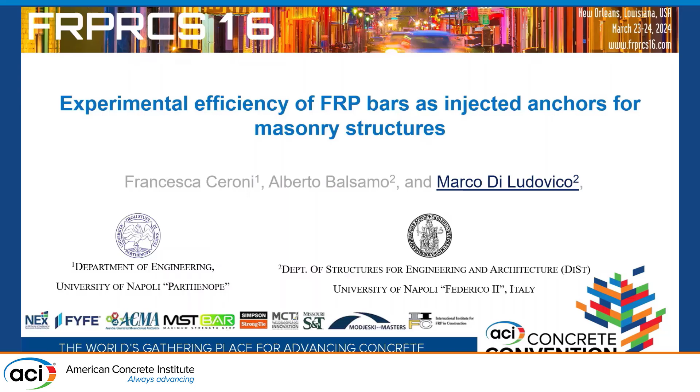So I will talk about the first presentation, about the experimental efficiency of FRP bars as injected anchors for masonry structures. This is work I did together with Francesca Ceroni from University of Naples Parthenope, and with Alberto Balsamo, also from our university. So let's take a step back.

Let's introduce the problem. As you know, Italy is a country very prone to seismic action. Our problem is that when an earthquake happens, we have very large and severe damage on masonry buildings, due to the fact that in several cases the connection between orthogonal walls is lacking or completely missing. In this case we have this mechanism: the simple overturning of the facade. When there is a little bit of connection, we can have the compound overturning. In each case, there is very high vulnerability of masonry buildings against seismic action, and that's why we need to do something to avoid this kind of mechanism.

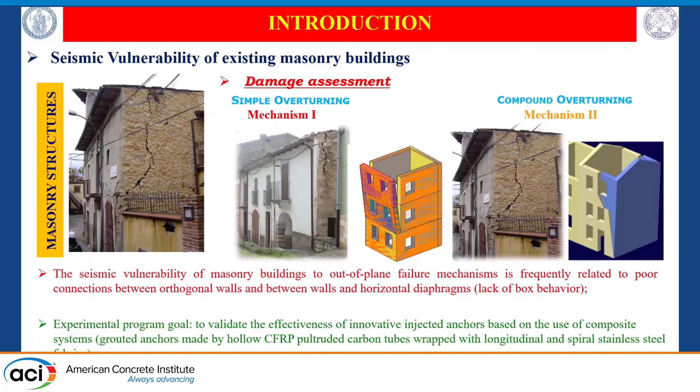Traditional solutions are mainly the use of steel ties, which is very common in Italy and in seismic areas in general, or the use of RC or steel confining elements. But what we are looking at is the use of injected anchors, traditionally made with steel rebars, the idea being to connect two orthogonal walls in order to avoid the overturning of masonry.

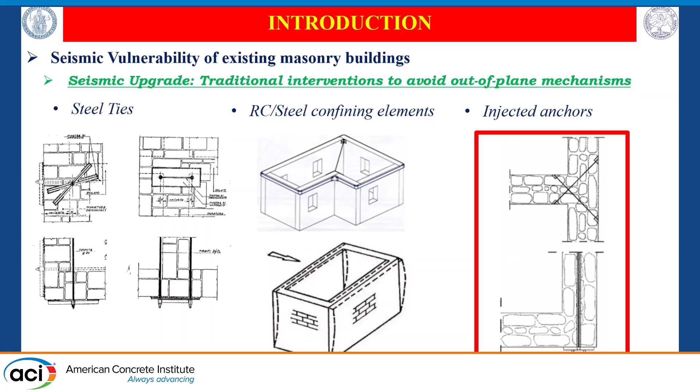It is a very good solution, as clearly demonstrated by this picture. This is Amatrice, a small municipality in central Italy, which was completely devastated by the earthquake in 2016. As you can see here, this was the core of the municipality, but one of the few buildings which remained, which stayed and did not collapse, was this one.

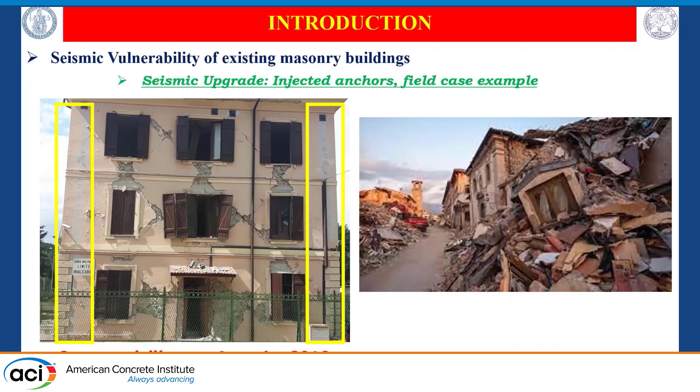You can see that they had already finished doing injected anchors, and the building achieved the so-called box behavior. The damage was then evenly distributed, as clearly demonstrated by the diagonal cracks. So the solution is good and it works, and this was demonstrated in the field, which is the most important test.

But now we are looking at how we can move forward, how we can use this solution by replacing steel, which is obviously a traditional solution but has very high problems in terms of corrosion. This is a typical problem we find in masonry when we apply steel injections, because especially when we use tuff masonry, this can accelerate corrosion, and then cracks can generate.

So the idea is to replace steel with FRP bars, which give us much higher strength and corrosion resistance, and in this way they can really be a sound alternative.

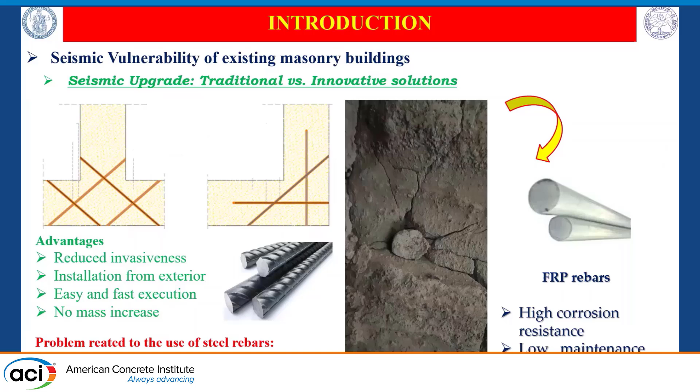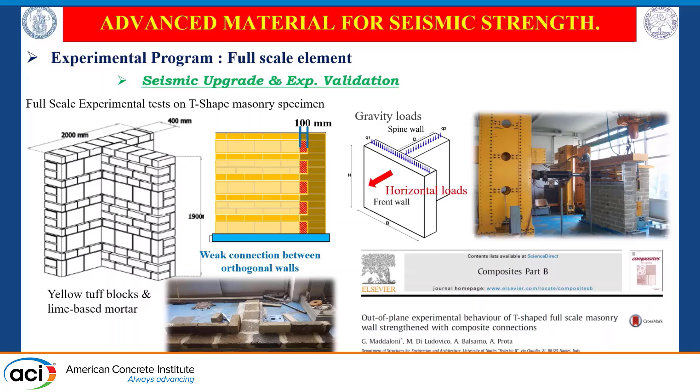So what we did: we started looking at this potential solution in 2016, when we decided to test a full-scale member, two walls very poorly connected, as you can see here in our lab. We applied gravity loads and horizontal loads to simulate the earthquake, and we decided to compare the behavior of the specimen without any kind of solution versus using injections made with FRP bars.

To be quick, this is the result we obtained during the test on the as-built specimen. Here we are plotting the horizontal force versus the drift, which is the horizontal displacement divided by the height. The red line and the orange line represent the theoretical force at which mechanism 1 and mechanism 2 can happen. Since we had a poor connection, the capacity of the member was in between the two mechanisms.

Then we stopped the test. You can see here the cracks at the interface between the two walls, and we decided to investigate the effectiveness of a new solution.

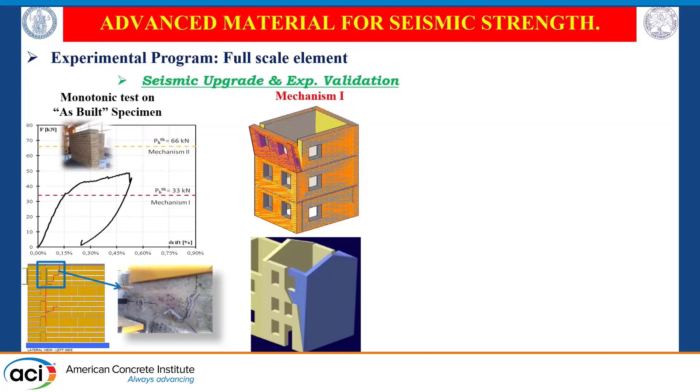In 2016, we used a carbon tube, which can be seen here, injected in this way. But in order to increase the bond between the injection and the masonry, we used this hollow carbon tube with a stainless steel fabric wrapped around it, to improve and increase the bond and avoid the solution being ineffective.

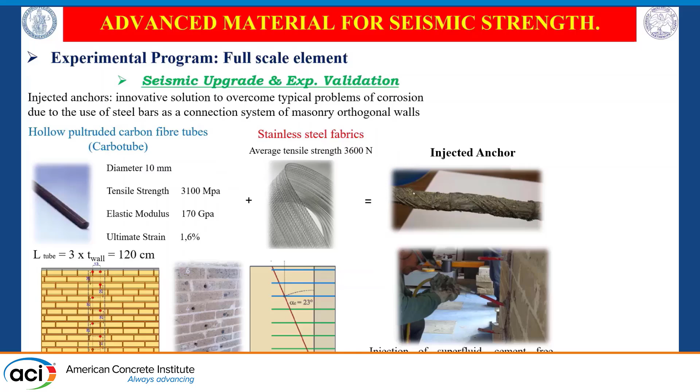So we did the test, and at the end, when we performed this kind of intervention, the new behavior is this one, reported in the green line, and you can clearly see how much the capacity increased.

We strongly overcame the capacity predicted by mechanism 2. In general, the failure moved from cracks at the interface, and we had no cracks anymore, just a rocking mechanism, demonstrating that the solution was really effective, with a very high strength and ductility capacity increase.

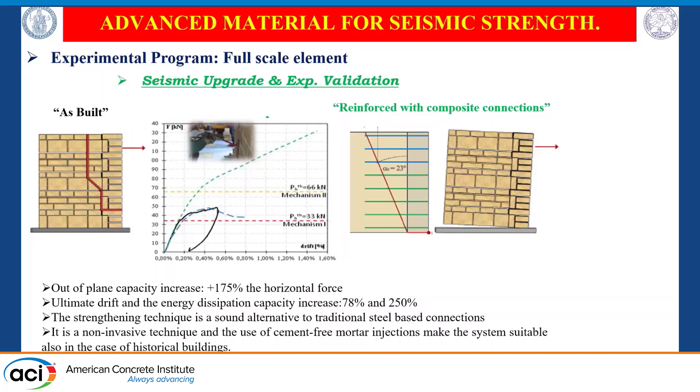This was done in the past. Now we are trying to understand: the solution is effective and sound, but we need to provide reliable design formulations to understand how much pull-out force we can use in calculations, so practitioners can design this kind of solution. First we did a literature analysis, and found a lot of theoretical formulations, mainly calibrated on steel rebars. So now we need to understand how these formulations apply when we replace steel with FRP.

Generally speaking, the pull-out force depends on several factors: the type of rebar, the type of surface treatment, the embedded length, the masonry quality, and the injection mortar quality, among others. Depending on these parameters, we can attain different kinds of failures.

The red one here is the cone masonry detachment. Then there is the probability of slippage between the bar and grout interface, or between the grout and masonry interface, called here CMD, SBG, and SGM, and we can also attain a mixed failure mode.

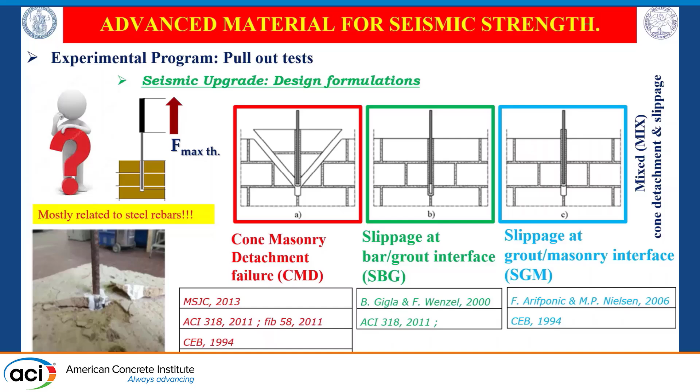So what we are working on now is defining and carrying out several experimental tests in order to evaluate how much the pull-out force is in the case of FRP rebars.

This is our test setup. We decided to test a specimen made of 3 blocks, made of tuff or other types of masonry blocks. The embedded length was 25 centimeters. An important aspect of our experimental program was the confining pressure, provided using this device to exactly simulate what happens in a building when there is gravity load in one direction and pull-out force in the orthogonal direction. So we had a confinement pressure of 0.4 megapascal simulating the gravity action on the masonry.

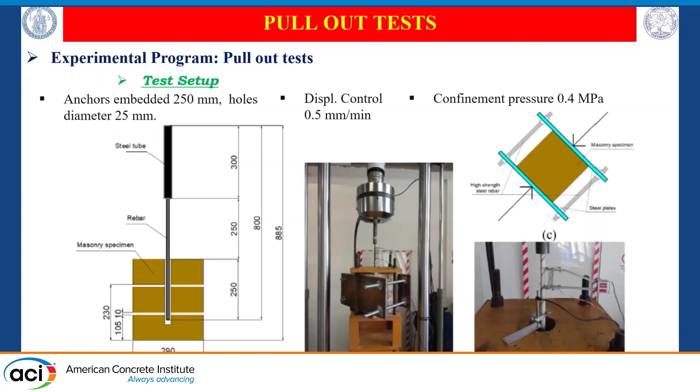Now I will try to summarize the results of 2 rounds of tests that we have done in these years. The first one, performed some years ago, details of which you can find in this paper.

We decided to investigate the effectiveness of several solutions. First, we used ribbed steel rebar as a reference, because the theoretical formulations are mainly based on steel. Then we used GFRP rebars and smooth carbon FRP rebars, with diameters of 12 and 10. We decided to replicate the surface treatment used in the preliminary experimental validation.

At the end we had 15 masonry prisms and 5 types of anchors: steel, glass rebars with or without surface treatment, and hollow pultruded smooth carbon FRP with and without the surface treatment.

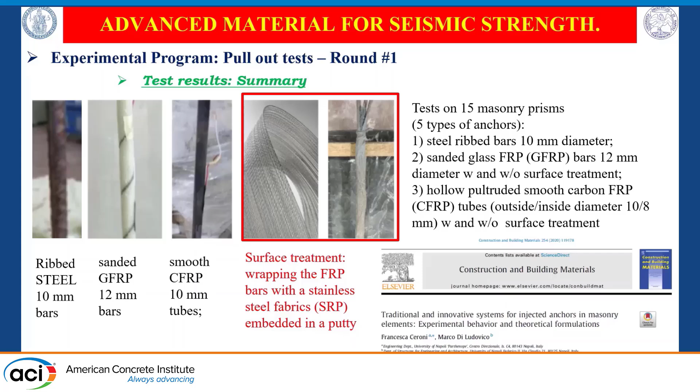Here you can see the failure modes attained during the tests. On the left, the green box shows slippage at the bar-grout interface, which was due to the bond not being good. When we look at the performance of rebars with surface treatment, we see two other failure modes: sliding at the grout-masonry interface, or the cone detachment, as shown here.

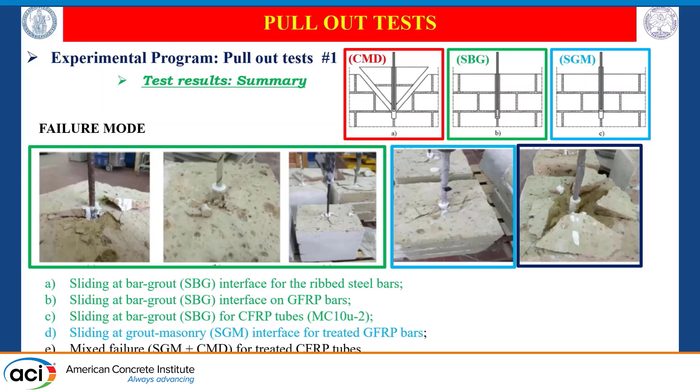In this slide I try to give an overview of our experimental results. Here you can see the specimen labels, meaning the material, which is masonry, then the bar type—steel, glass, or carbon—then the diameter, and then the surface treatment: ribbed, treated, or untreated, with the stainless reinforcement shown before.

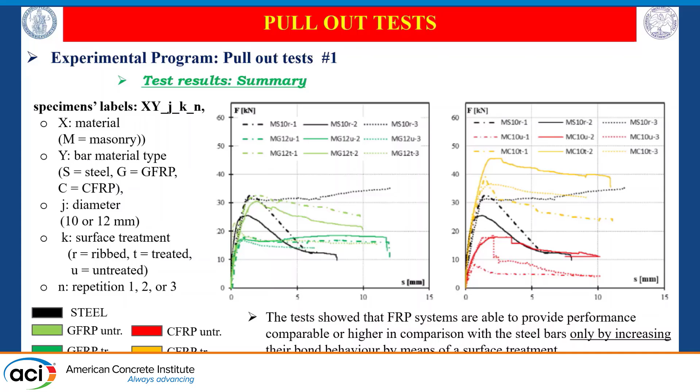The black curves are the 3 repetitions made on steel rebar, the green ones relate to GFRP, and the orange and red ones to CFRP, treated and untreated. Comparing the force-slip displacement, when we compare these rebars' performance with steel, a good behavior is attained when surface treatment is done—similar to or even better than steel—while without surface treatment, the results are less significant than those attained on steel rebar.

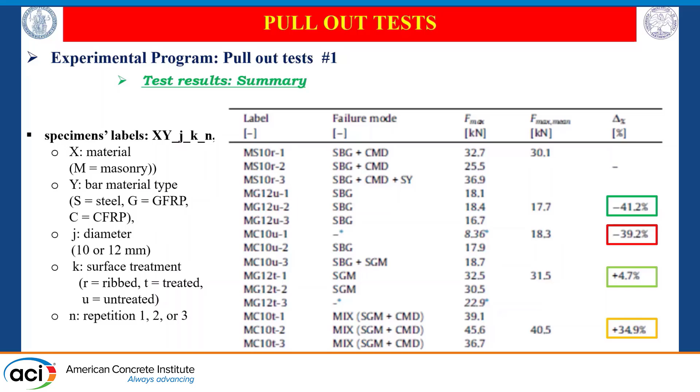Here you can see in this table the final values of the pull-out forces and the average values, and how much, with or without treatment, we had different results with respect to steel. Without treatment we lose 40% of the pull-out force, while in the second case we attained more or less the same value, or even in the case of carbon solution plus treatment, the same solution used in the full-scale specimen, we attained a pull-out force even greater than that achieved on the steel rebar.

Since our final goal is to calibrate a theoretical formulation, we decided to enlarge our experimental test program, so we have round 2, and now we are looking at the performance of other kinds of rebars: basalt rebars with diameter 8, and carbon smooth. The basalt has a helicoidal ribbed wrapping, as you can see here, and then glass, diameter 10 and 12, with another type of surface, an helicoidal wrapping, and finally a new solution investigated in this round of tests: a glass spike with a sand coating.

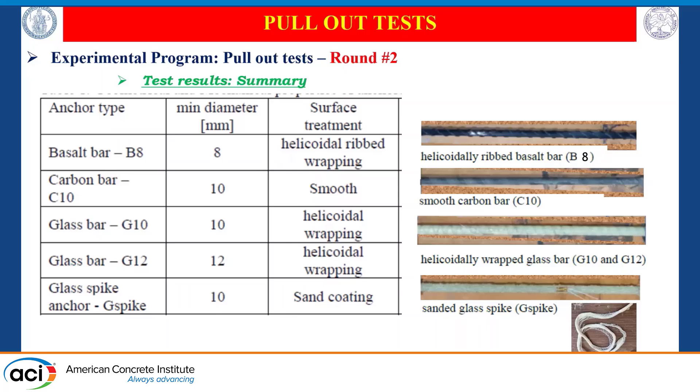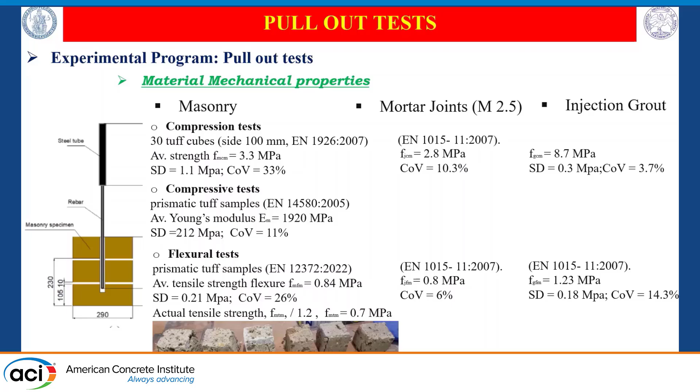You can see this is the original spike, which can then be realized in this way. So again we tested all the materials. I have no time to give you all the details about the material properties, but I want to show you that we did all the tests on masonry, mortar joints, and injections.

Very quickly, moving close to the conclusions, these are the results we obtained. This is the GFRP rebar behavior, 10 millimeters diameter and 12, and you can see here the failure modes. In this case the masonry quality was a little poorer than in the previous round of tests, which was the reason why we had in most cases mixed failure modes. But it's interesting to see that after the peak on GFRP bars we had a quite sinusoidal trend, due to progressive slippage between bar and grout, which resulted also in a reduction of the bonded length. So this was the behavior recorded by the tests.

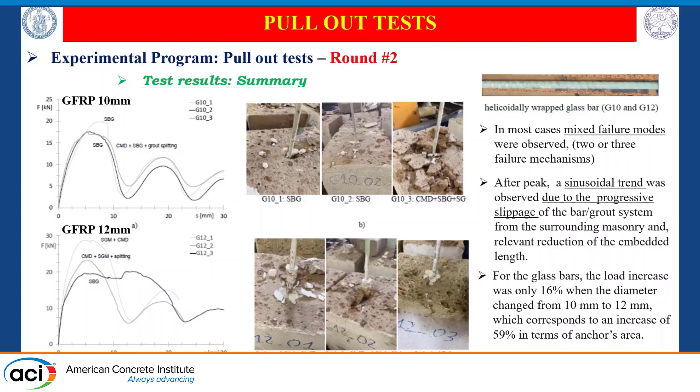It's also interesting to note that moving from 10 to 12 millimeters, the load increase was not as high as the area increase. So the load increased by a factor of 16%, while the area increased by a larger factor.

Moving to basalt, you can see the ribbed basalt bar performed quite well. We had a force which was greater than before, so the highest value of tensile stress was achieved. There was also good behavior after the peak, so there was a residual bond giving us ductility.

In the case of carbon bar 10, with another surface treatment which was smooth, we had not such good results in terms of load, and this is because obviously the bond plays an important role.

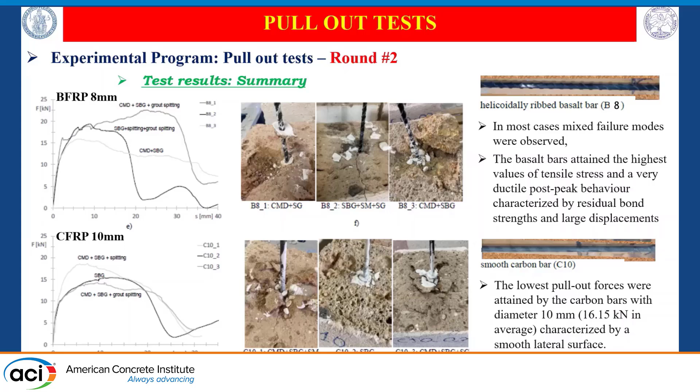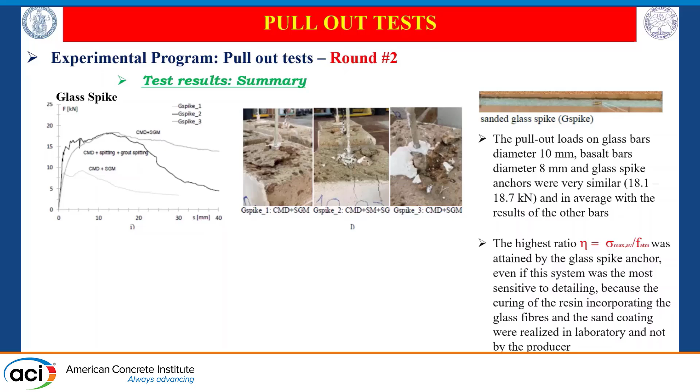Finally, the glass spike that we tested was really surprising because it gave a good result both in terms of pull-out force and ductility, but the most important fact was that it attained the highest ratio between the maximum stress in the rebar and the stress related to the capacity of the rebar. In this table you can see the ultimate stress capacity of each rebar and the one achieved during the test, and this is the ratio. With this solution we attained a very high value, 0.4, so we exploited almost half the capacity, almost 2 times the capacity of the rebar compared to the other solutions.

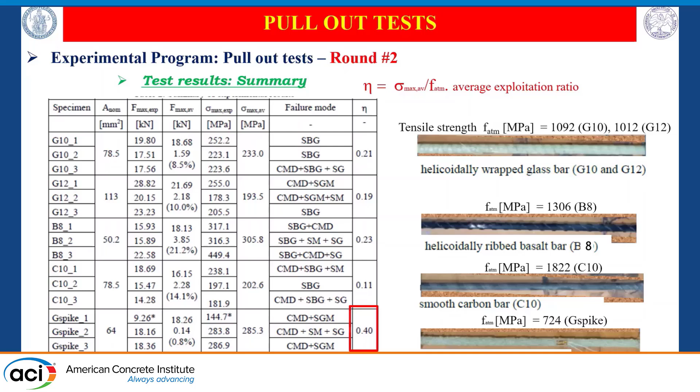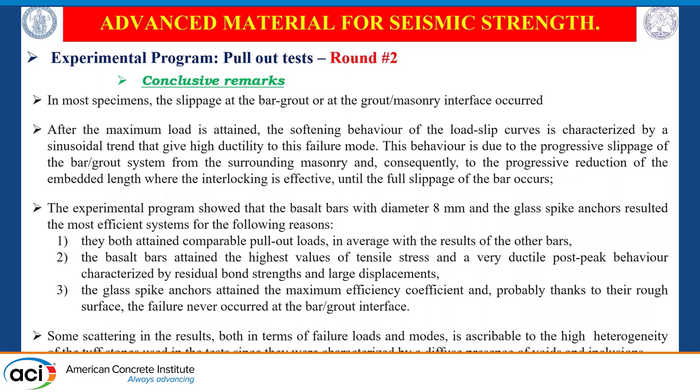So these are the conclusive remarks of this second round of tests. I don't want to repeat all the conclusions related to the behavior of these rebars; instead I want to spend my last 30 seconds giving an insight about the design formulation.

As I told you, there is no formulation for FRP, so what we have done was collect all the results available in literature on steel rebars and FRP rebars. Here you can see our experimental points, and we tried to define a unique relationship, not depending on the type of failure, just one theoretical formulation which can be used to evaluate the theoretical pull-out force. Then we move through the Eurocode approach in order to pass from the experimental value to the design value by using a reduction factor.

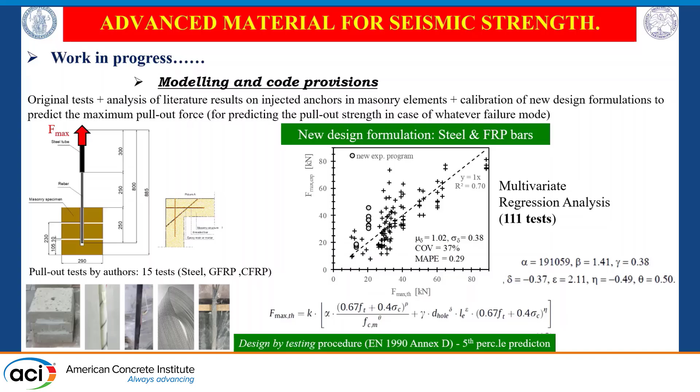Which is reported here. Obviously we need more data, so we expect to enlarge our test results to refine this design formulation. And this was my last slide.